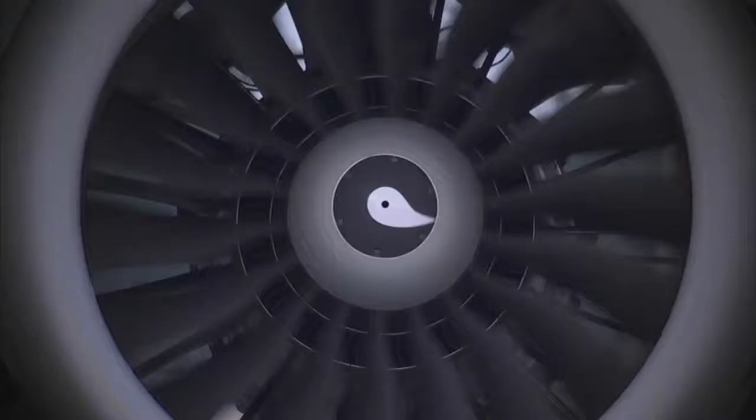The aircraft of today are quieter, more efficient and stronger than anyone could have imagined, even a few short years ago. Of course, future aircraft will continue this trend and become even more efficient and dependable, reaching unimaginable goals that today's aircraft could never reach.

But how will they reach these goals, and who is performing the important work to change the way we all fly? The common misconception is that most advances come strictly from major aircraft manufacturers. But the true story is much more complex. Unknown to most of the public is that one of the unsung leaders in aviation is NASA.

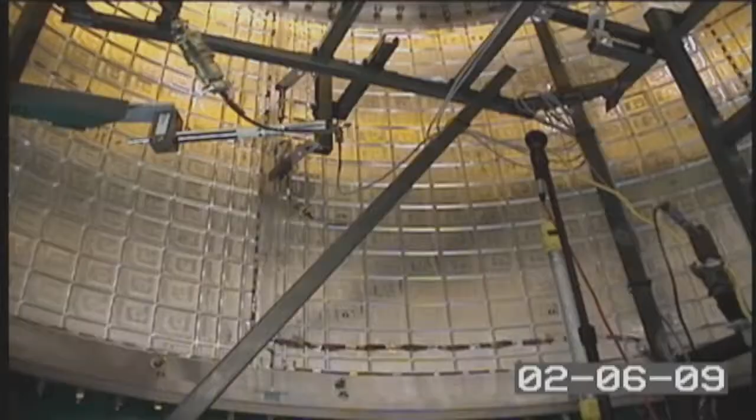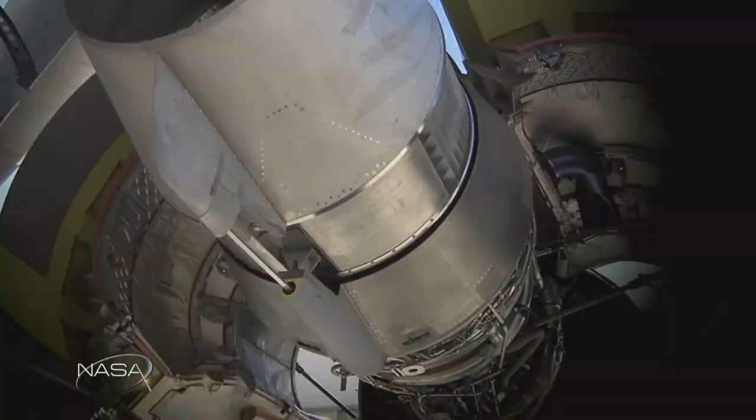NASA engineers work hand in hand with industry planners, developing and testing new designs to make aircraft safer, greener, and much more efficient. On this episode of NASA X, we will look at how this collaboration works, and we'll see how NASA and industry are paving the way for greener, safer aircraft for today and for aircraft of the future as well.

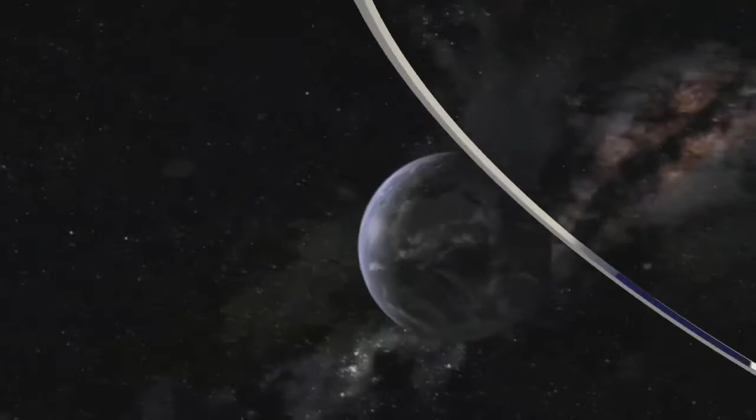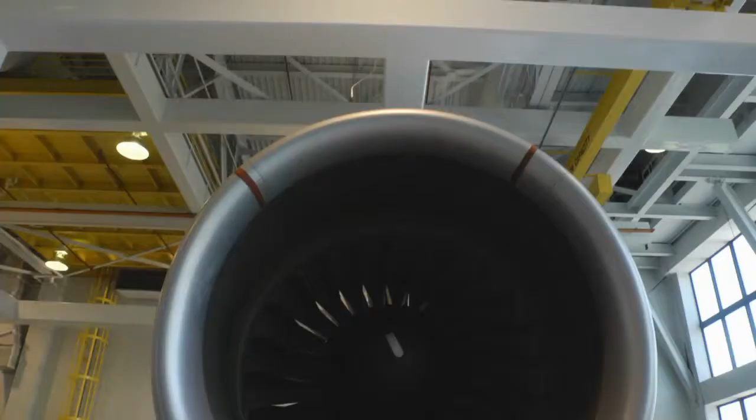This is a familiar sight for modern travellers. Large metal jets roaring down the runway and lifting into the air. In fact, this sight really hasn't changed that much in the last 50 years or so. Other than the way most people dressed for flights back then, the basic concept of air travel is pretty much the same. There have, of course, been measurable differences in fuel economy, with new developments in engine design and noise reduction techniques. But the basic tube and wing shape and the material used to build these aircraft has remained pretty much the same for years.

But that isn't the case anymore. Like so many products that have evolved dramatically in the last few decades, like phones for example, the same is true for aircraft design. Today more than ever, researchers are pushing the boundaries of the science of flight in their effort to make aircraft of the future more efficient, quieter and greener.

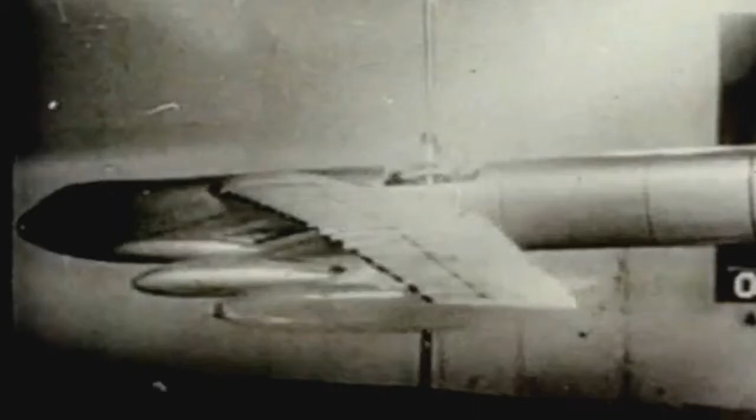So who's taking the lead and why? Obviously industry is taking the lead in some areas because cleaner operations and more efficiency mean higher profits. But they're just not the only players. One of the leading innovators in aeronautics over the history of flight has been and continues to be NASA.

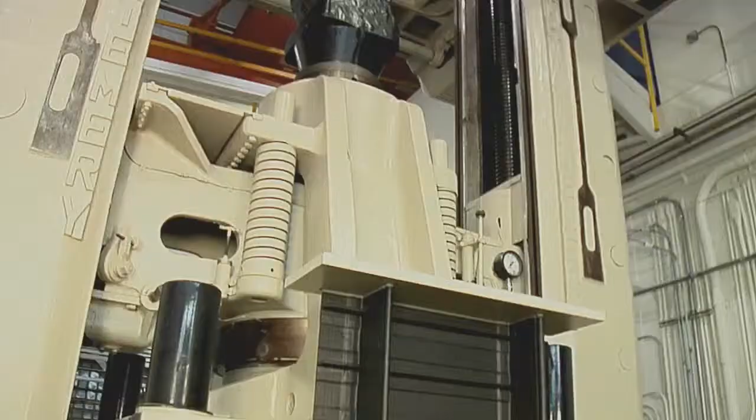The push to modernise and change aircraft of the future is being led by NASA's Environmentally Responsible Aviation project, or ERA. The ERA project is putting its money where its mouth is with tough but reachable goals to make big changes in how we fly by the year 2025.

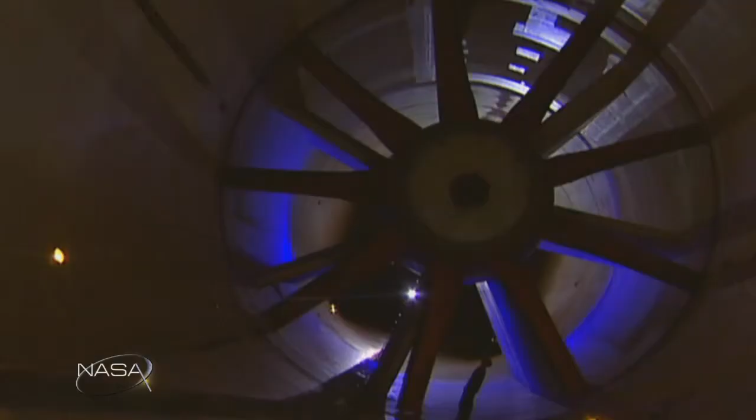So the Environmentally Responsible Aviation project is a 5-year, 6-year project, and it's focused on advanced aircraft design and the technologies that are needed to enable them. The main goal of the project is to reduce noise, to reduce mission fuel burn, and to reduce LTO NOx emissions. And LTO stands for landing takeoff, oxides of nitrogen emissions.

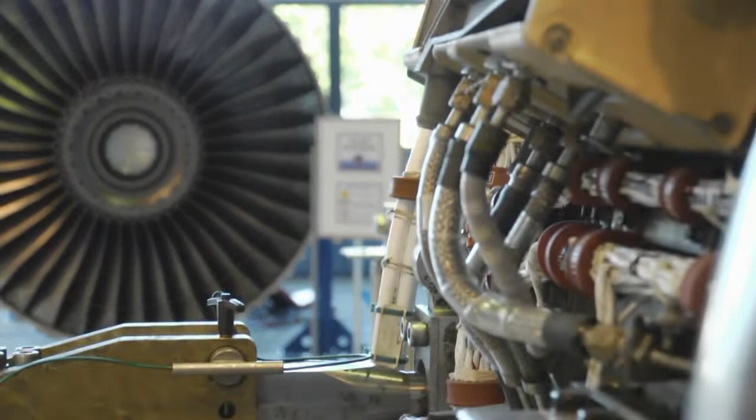And we want to do that simultaneously, and that's never been done before, where we looked at some very difficult metrics and tried to push all of those metrics down simultaneously. And so over this 5 or 6 years, we'll be looking at technologies, we'll be looking at aircraft designs and the combination of those to end up with a configuration that could simultaneously attack these goals.

So how do you make these goals a reality? The 4 basic principles of flight are lift, drag, weight, and thrust. Finding efficiency in each of these basic principles will help reach NASA's stated goals. Let's look at weight first. Obviously, if you can reduce the weight of an aircraft, then you will burn less fuel and therefore become more efficient. Airlines are always looking for ways to carry less weight.

You can see that in extra baggage fees, reduction of heavy items such as ovens and heavy carts on some planes. And in one of the most drastic measures taken in recent years, some airlines have begun asking passengers to use the bathroom in the terminal before getting on the plane, making the passengers a little lighter. In a 1-month experiment, an airline found that they reduced greenhouse gas by 5 tons simply by asking passengers to use the loo ahead of time. This proves that even small changes in the weight of an aircraft can add up to big long-term benefits. The holy grail, of course, is to make the entire aircraft structure lighter.

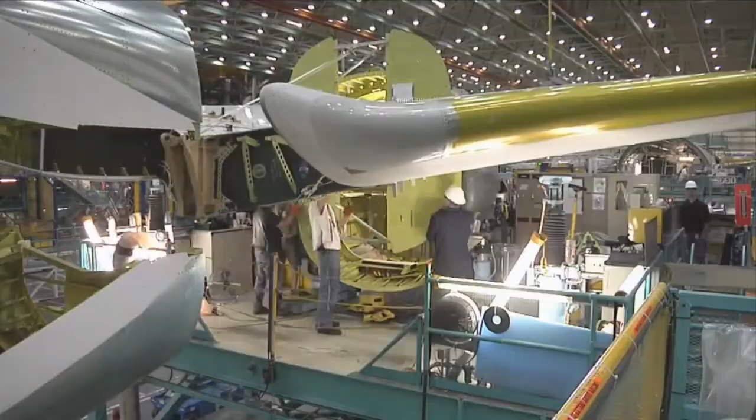So how can this be done? Today's aircraft are made out of metals that are safe, but that are also very heavy. So is there an alternative? In recent decades, NASA and its industry partners have been working hard developing new materials that could bring aircraft out of the 20th century and into the future.

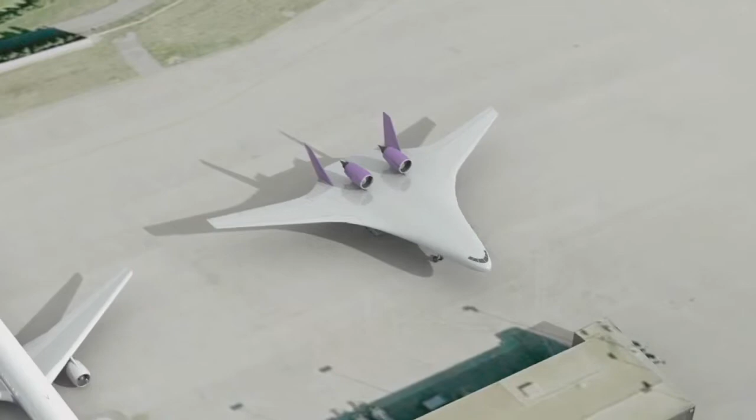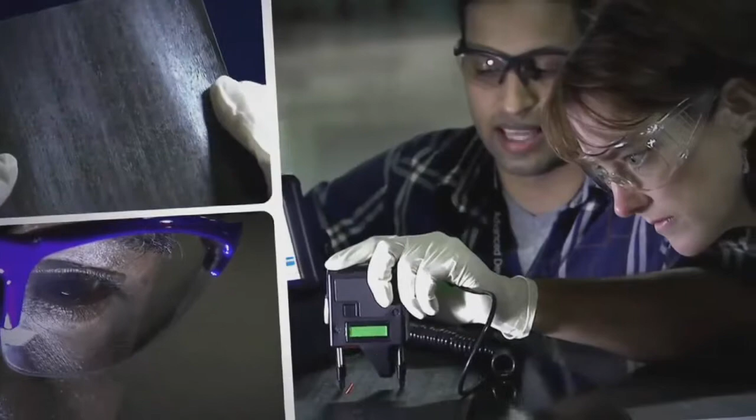New composite materials are leading the charge to replace conventional metals. Aircraft designers are taking advantage of composite materials' lightweight, strength, and flexibility. Aircraft designers have long known about these qualities and have been using something called carbon epoxy composite materials in small quantities for decades.

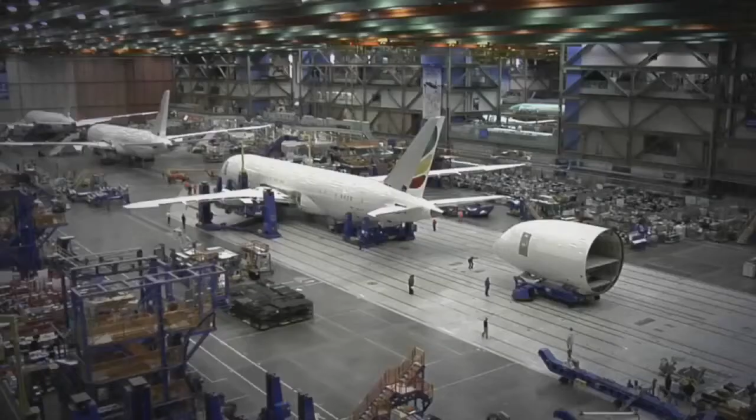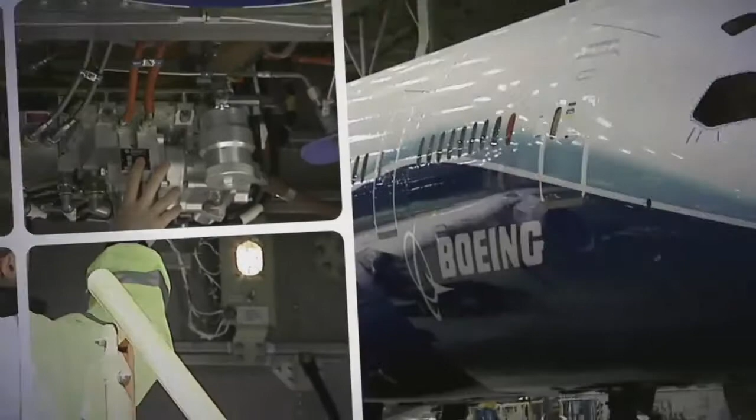After years of research and validation of composites for flight, the Boeing company was the first to step up and build an aircraft almost completely out of composite materials. Called the 787, this next-generation aircraft first came into service in October of 2011. As the first official commercial flight of the 787 took off from Tokyo that year, it was clear that this concept of an all-composite aircraft was here to stay.

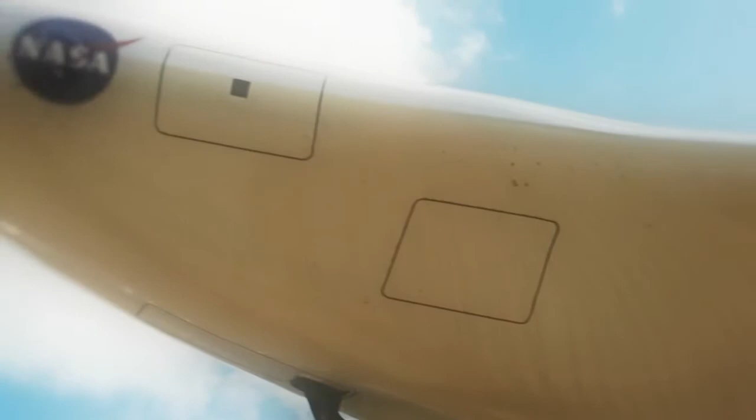NASA is not in the business of building aircraft, but they are in the business of helping lead development programs to move the science of flight along. Once validation and testing in the development process is complete, NASA shares its findings with industry in an attempt to help further research and development.

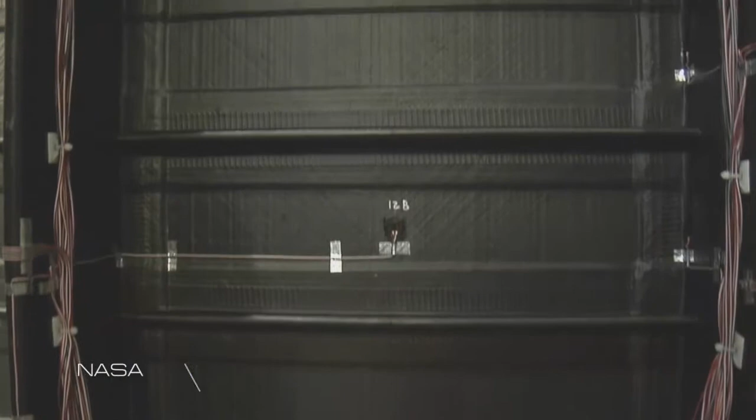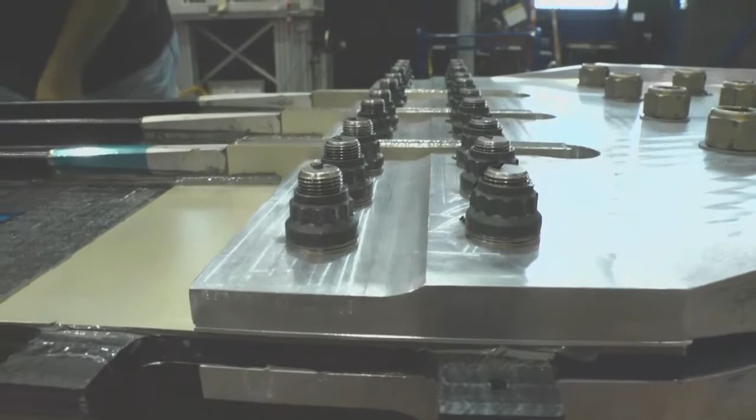One of the programs in which NASA is working with industry is in the development of new composite materials for aircraft. Here, in the Structures and Materials Lab in Building 1148 at NASA Langley Research Center, much of the development of next-generation composites for use in aircraft is taking shape. Called PRSEUS, this new idea has the potential to completely rewrite how composites for use in aircraft are made.

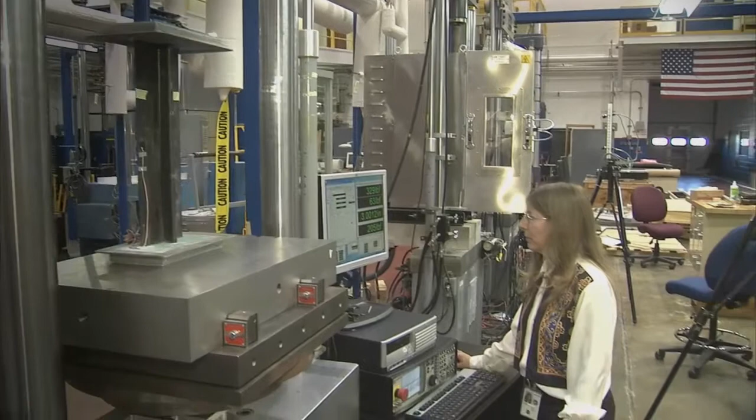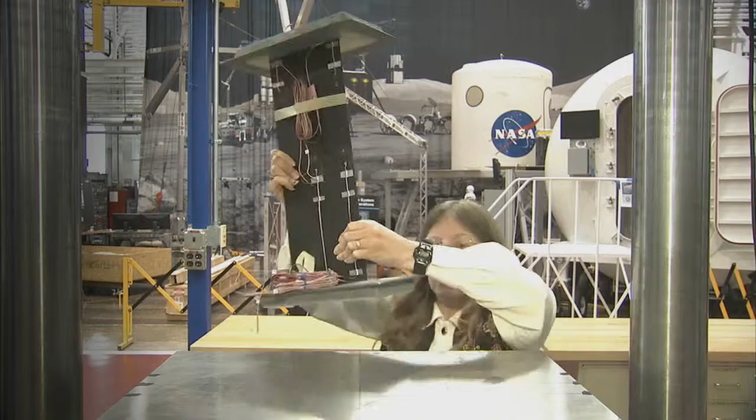Leading much of the research for NASA's Environmentally Responsible Aviation program in the composite field is NASA Langley's Dawn Jegley. This MIT grad has been working with these materials for decades and has a keen understanding of what needs to be done to make these composites of the future fly.

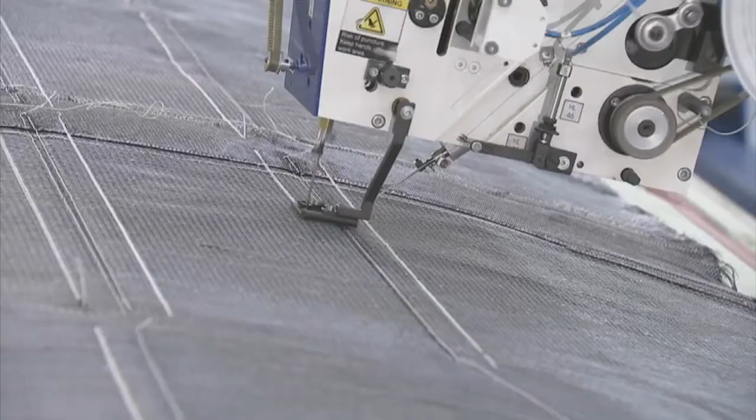PRSEUS stands for Pultruded Rod Stitched Efficient Unitized Structure. And what that means is that we have a graphite epoxy or a carbon epoxy structure, and what we have is pultruded rods inside carbon layers. We have a carbon skin, and we have stitches that run through the thickness that holds the whole thing together. One of the huge benefits associated with PRSEUS is its revolutionary stitching technique.

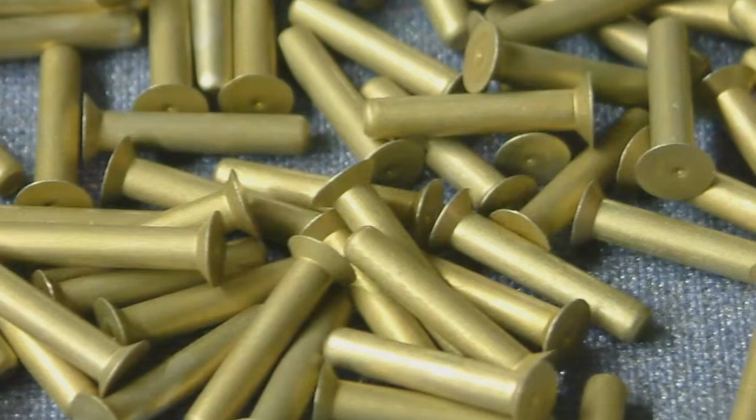On current metal and composite aircraft, one of the key components used to hold the vehicle together are the fasteners, like rivets or bolts. Although these are effective, one major drawback is that quite a few holes have to be drilled into each piece where the fasteners will be added. Not only is that labour intensive, but each hole represents a place where damage or a crack could start. But the stitching prevents that from happening.

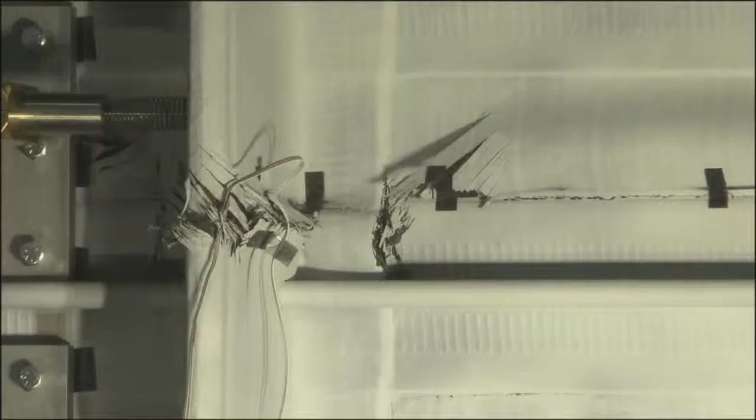We found that if you have a crack and it grows to a certain point and it gets to some place that it's stitched, that crack will turn. So instead of going through the stitching, it will turn. And that's a good thing because in flight, you would rather not have a crack grow all the way around a wing. When you look at a piece of carbon epoxy composite material, it honestly doesn't look very strong in its raw form. But once it is in its final state, it can be much stronger than metals.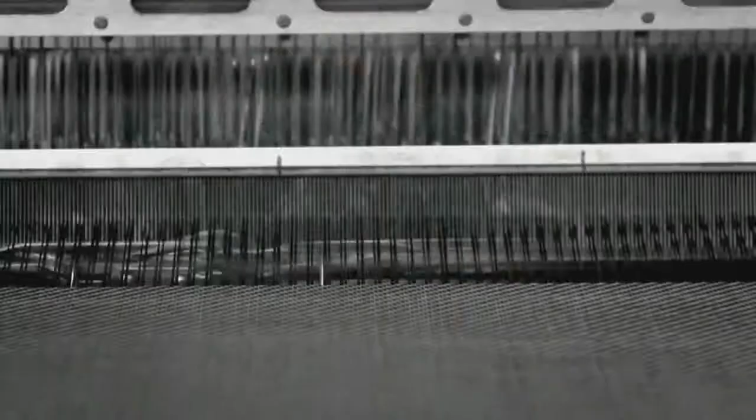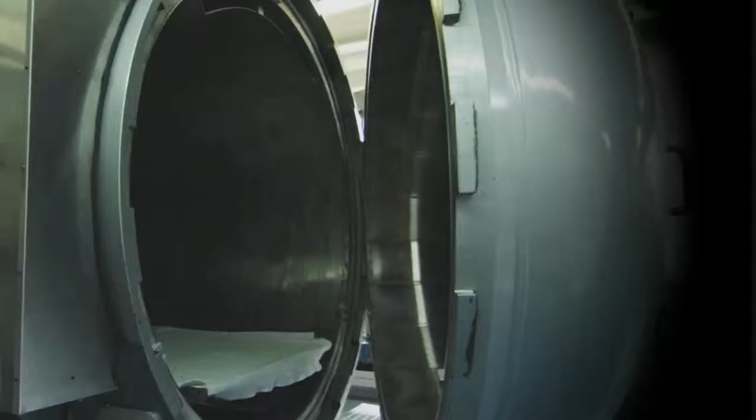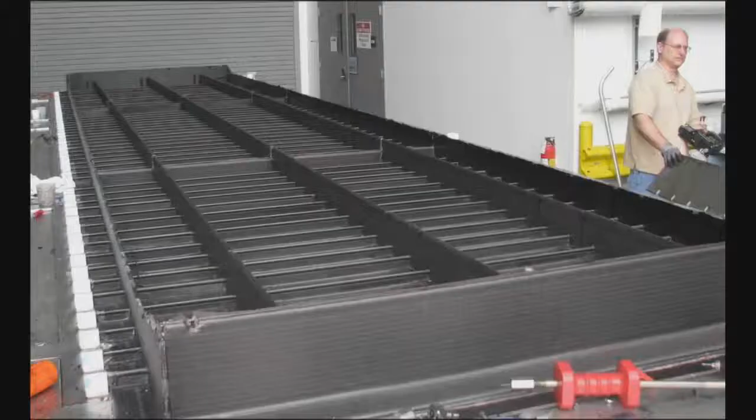We start out with a fabric. It looks kind of like carpeting. And you roll that out into the shape that you're looking for, and you position all the different parts of your structure where you want them, and then you come through with a stitching machine. After you've stitched the whole thing together, the panel goes into an oven. It's infused with epoxy. We heat it up, and then we get everything just the way we want it, and then we cool the structure. So what happens is you end up with a piece of material, could be a very large piece of material, which is now stiff and strong and just in the right shape that you want it.

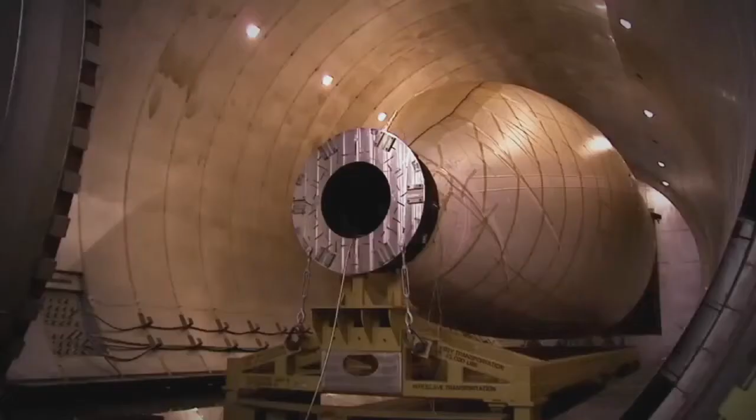Another key component to carbon epoxy composite materials is that they can be tailored to be much stronger than metal. At the molecular level, the properties of metal are isotropic, which means that the properties all run in the same direction. Because of this feature, aircraft designs are very bulky in some areas to provide stiffness, making a craft much heavier. But with composites, you are starting with fibres which are very strong, tough threads, and you can position those threads in any direction you want.

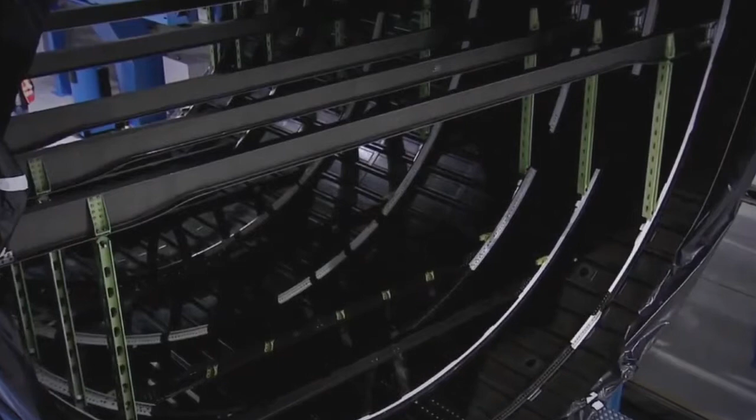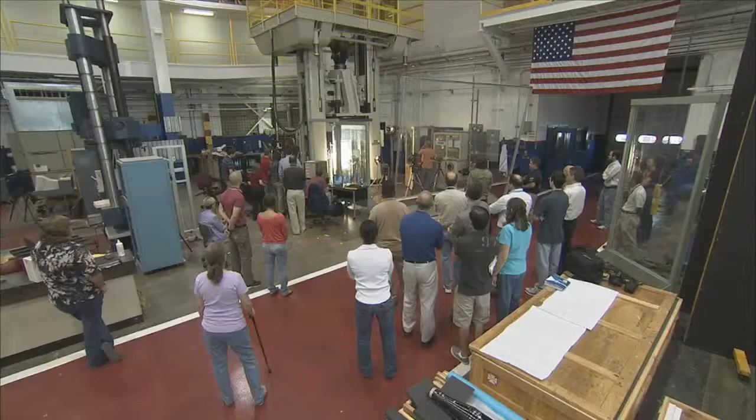For example, if there is an area on the aircraft that takes a lot of load, the designers can place the fibres in that direction, providing enormous strength, but while also using much less material and weight than metal aircraft. Of course, validating that the pieces will work is a major component of the development stage. So I know that NASA really does some great testing of its materials before they go onto any aircraft.

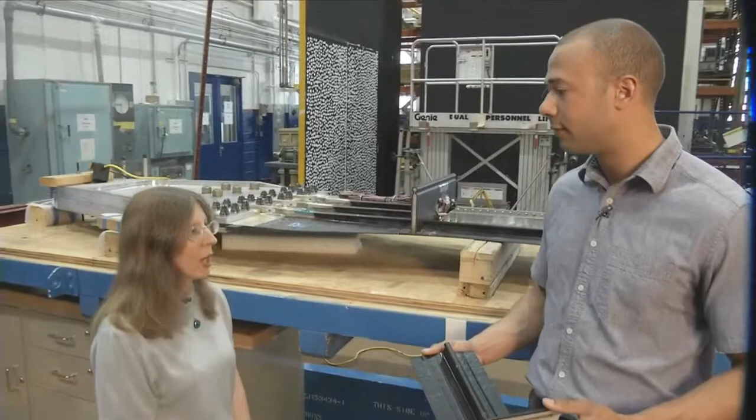How are you testing PRSEUS at the moment? One of NASA's goals is to develop technology for future aircraft. When we're developing a new structure, one of the things we need to do is fully understand how it's going to behave. And to do that, we start by looking at very small pieces, and then we move up slowly to very large pieces until we get to a full-scale part of an aircraft.

And then when we understand that, we go to the next stage, which might be something more like this, where we have what we call a built-up structure. So we have a skin, and then we have a stiffener on it. And then we can apply a load. We might push on it, we might pull on it, we might bend it to look at how that behaves.

And all the while we're doing this, we're doing analytical studies to make sure we understand and can predict how it's going to behave. Because if we don't predict it properly, then we feel we don't really understand it well enough, and we have to take a step back and figure out what it is we're missing. We have many facilities around the center here that we use for doing those kind of tests.

Well, Dawn, thanks so much for talking to us today about PRSEUS. This looks like an amazing technology, and you're doing a fantastic job. Thank you so much. Thank you.

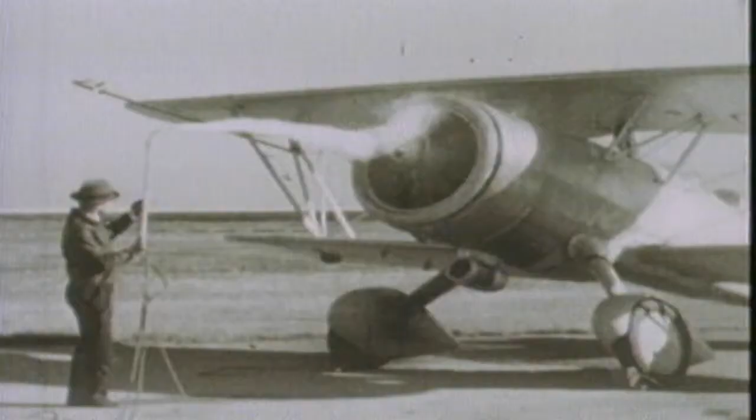Up next, let's look at another of the basic principles of flight: thrust. Since the earliest days of flight, engineers have looked for ways to make the engines we use on aircraft more powerful and efficient. One of the most important early engines was the 1903 Wright brother design that was used for their very first flight at Kitty Hawk. It only produced about 12 horsepower, but it opened the door for all aircraft engines to come.

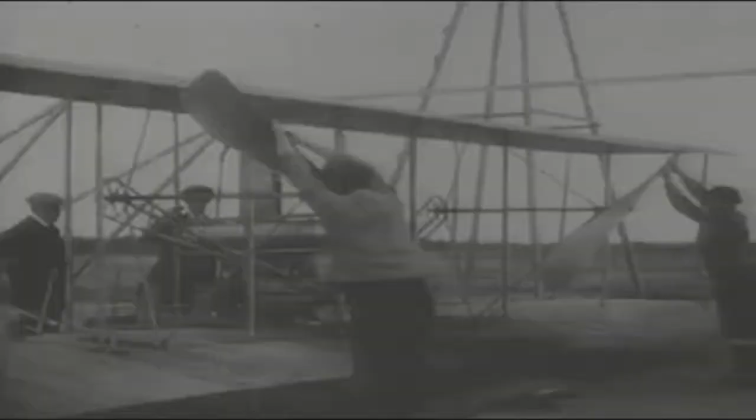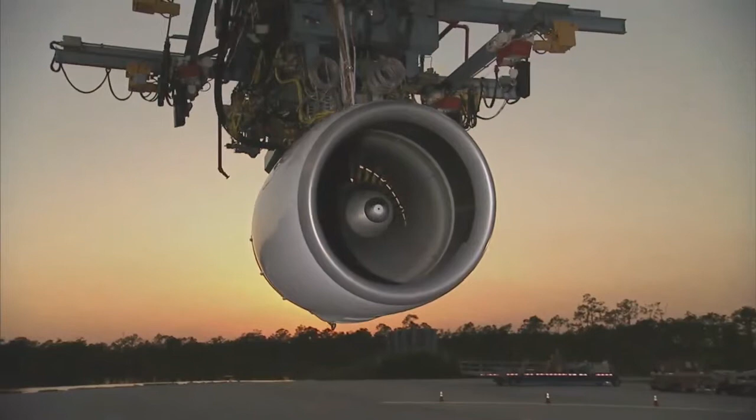Since that time, there has been a steady progression in the development of engine technology, from the relatively simple propellers of the past to the incredibly advanced jet propulsors of today. Engines have never been better, but although current engines are already very efficient, quiet, and relatively green, they pale in comparison to what the next generation of engine technology will be.

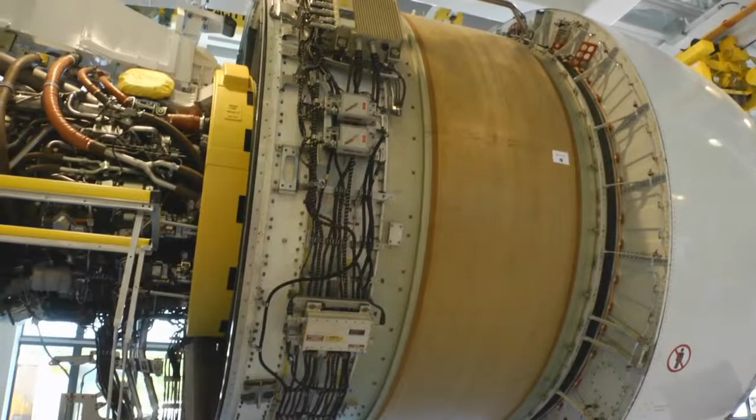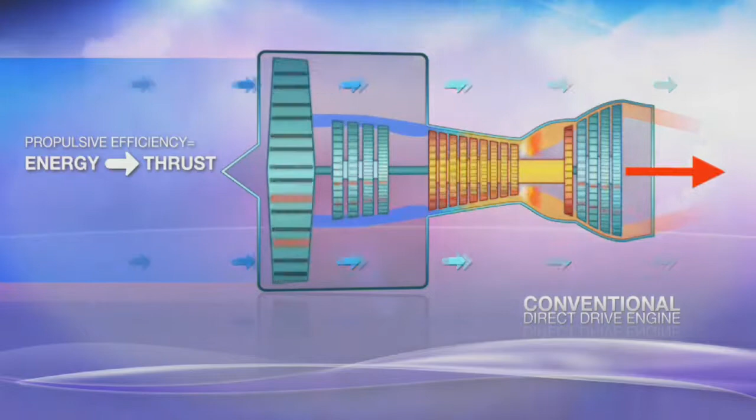To help understand how engine technology is improving, let's first take a look at how a basic turbofan engine works. Incoming air is captured in the engine inlet. Some of the air passes through the fan and into the compressor and burner, where it is mixed with fuel for combustion. The hot exhaust passes through the core and fan turbines and then out of the nozzle. The rest of the incoming air passes through the fan and bypasses or goes around the engine. So a turbofan gets some of its thrust from the core and some of its thrust from the fan.

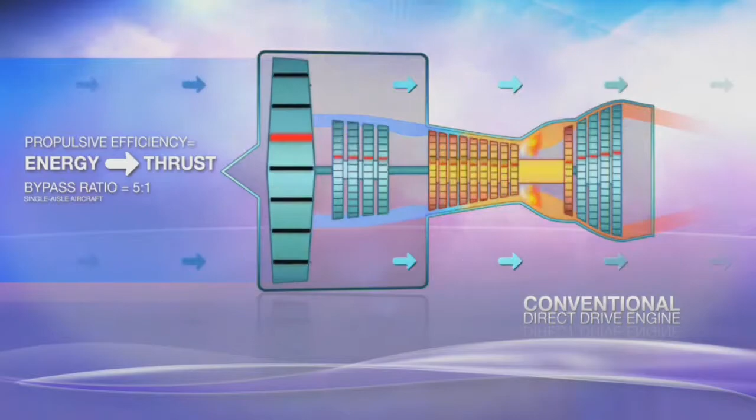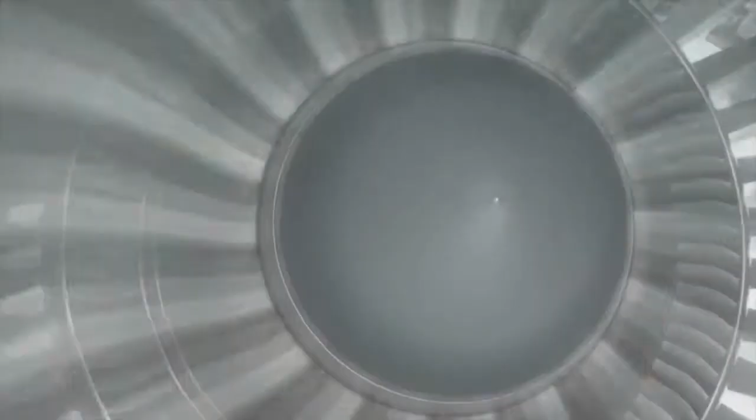The ratio of the air that goes around the engine to the air that goes through the core is called the bypass ratio. Many engines today have a bypass ratio of roughly around 5:1. Engineers have known for many years that if they could increase the bypass ratio, then the engine would become much more efficient. But the trouble with increasing the bypass means that the size of the engine would have to grow, making it heavier and also unable to fit under the wings of most planes. So, what to do? Over the past 20 years or so, NASA and industry have been working on a solution that would create ultra-high bypass engines while also addressing the stated problems of size and weight.

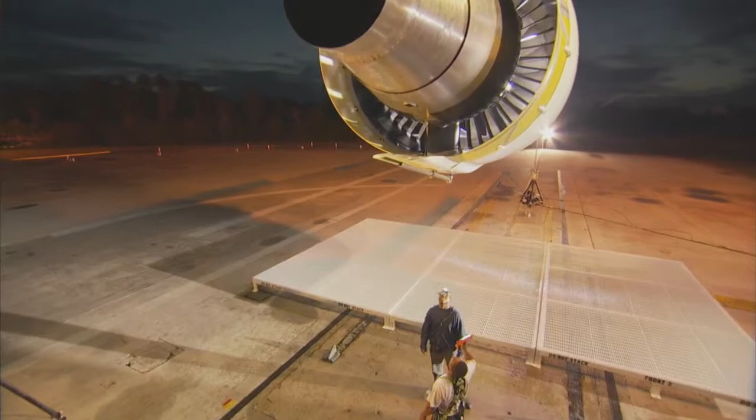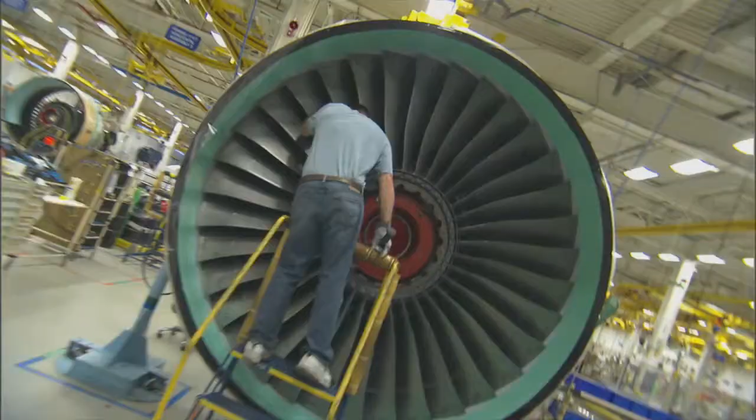Today, a new engine designed in collaboration with Pratt & Whitney and NASA has been developed that will more than double the bypass of current engines. This new engine design has taken many years of research and development just to get to the point where we are today, because 3 key pieces of technology needed to be created that didn't exist: a new gearing system, an ultra-efficient fan, and a more efficient nacelle.

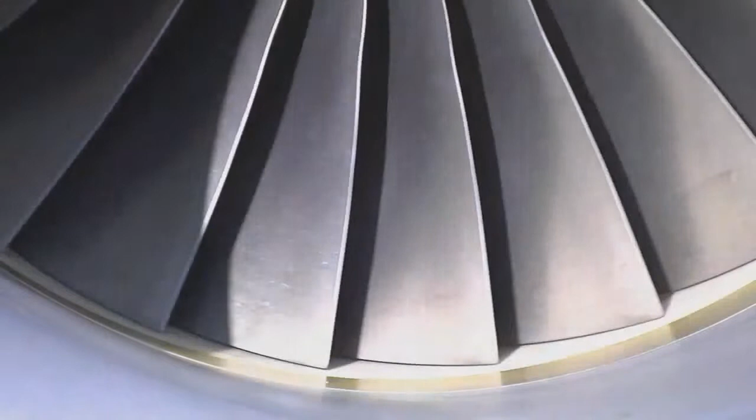Although each of these were difficult to perfect, one of the most challenging was the gearing system for the turbofan. This is because there is a paradox in engine design. The slower the big fan at the front moves, the more efficient it is, but the turbines at the back have to move at a very high rate of speed to work efficiently, hence the paradox. In order to have the slow-moving fan at the front and the fast-moving fans at the back working together, a revolutionary gear system had to be developed that could allow both of these parts to work together optimally.

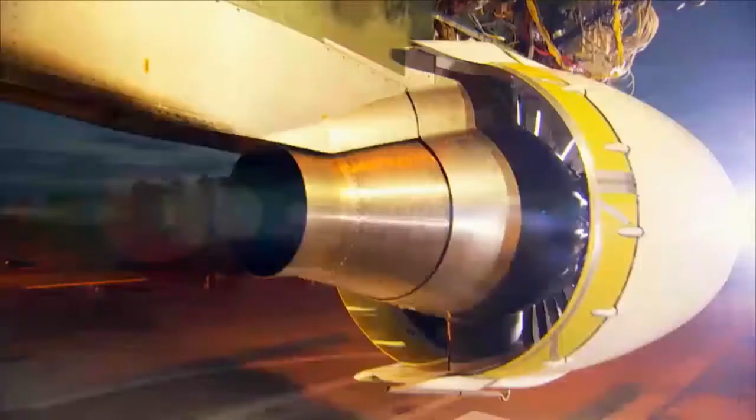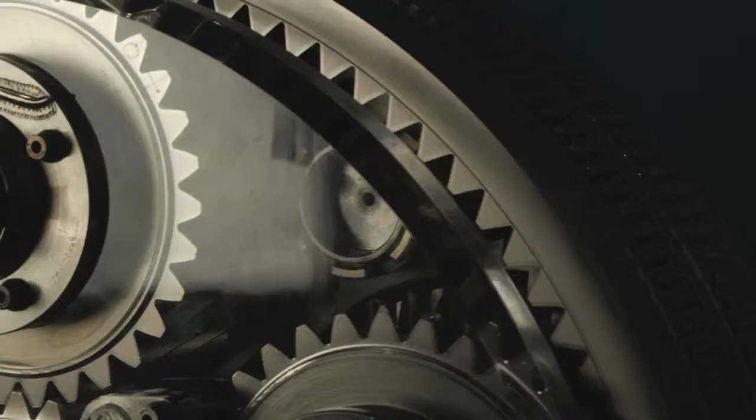So what the gear lets me do is shrink the core engine that makes the power to a large degree. It makes it lighter, takes a couple of thousand parts out, and it means I can replace some very rare super alloys with some more common gear steel. We always knew you could do that, but you need a gear that's way over 99% efficient. We're talking about 25,000, 30,000 horsepower gears.

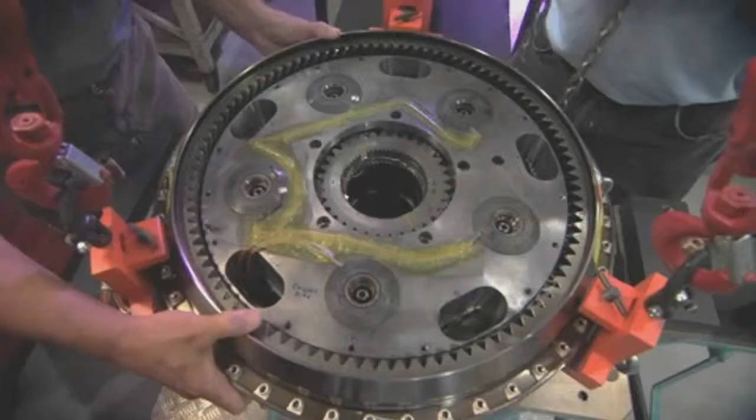A naval ship has that sort of power, and the gear is the size of a small house. We had to develop a gear that's the size of a small automobile wheel, not a house, and it has to last 20 years without maintenance, and it has to be super efficient. And so we've been working on this for at least 20 years.

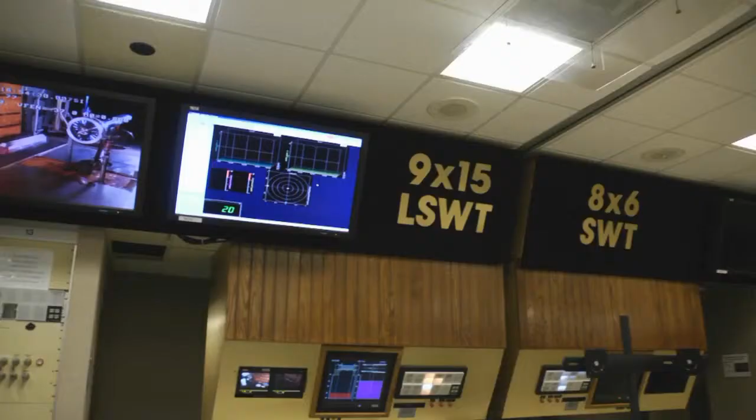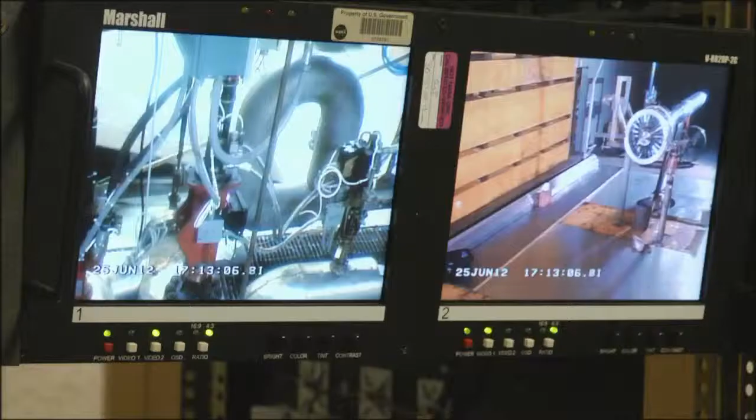Much of the testing for this engine has in fact come at NASA laboratories. NASA's unique facilities and subject matter experts have helped the Pratt & Whitney team to understand how to configure the ultra-high bypass engine. So this is an example of the ultra-high bypass engine from Pratt & Whitney called the geared turbofan. This particular engine has a bypass ratio of up to 15:1, which means 15 times the amount of air goes through this part of it as goes through this part.

This is the core, or the engine part. This is the bypass part. In this particular engine, most of the thrust is generated in this part, and we've removed the fan so that you can see how small the engine airflow is compared to the overall flow.

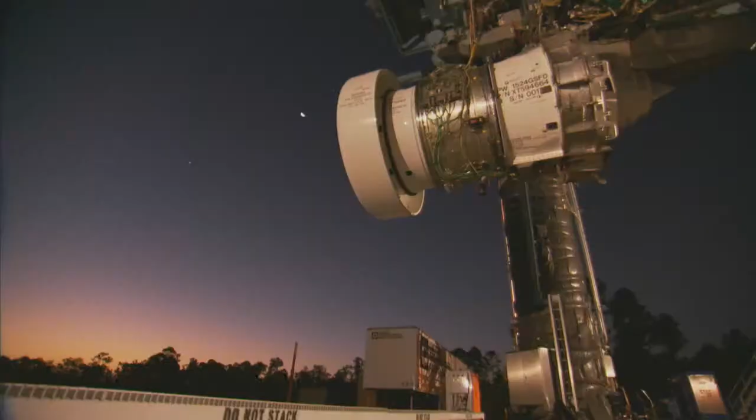So why do we want to do this? Well, this particular design, especially the one Pratt & Whitney is working on called the geared turbofan, has the potential of having as much as 20% better fuel burn than a regular jet engine today. And the reason they can do that is because the more air that you can put up here, the more efficient the engine is and the better the fuel economy.

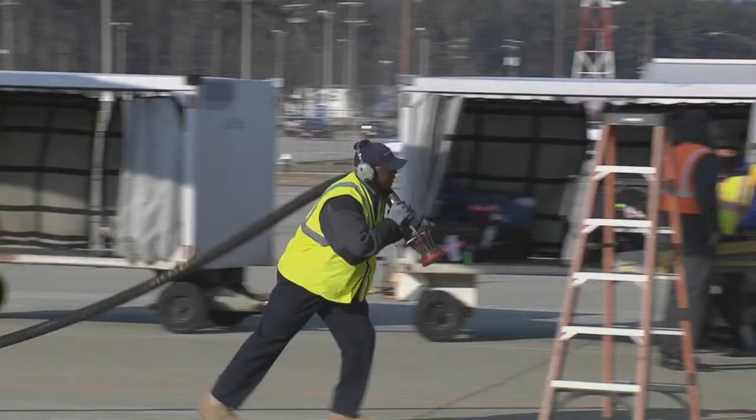Because fuel costs have spiraled out of control in recent years, the fuel efficiency of this engine could be a game changer for the aircraft industry. The people who care are not so much Airbus, but their customers, the airlines. So an A320 with these engines on compared to the current engines will make $200 to $400 an hour, on the order of $1.5 million to $2.5 million a year reduced fuel cost, depending upon the cost of fuel, typically. So it's worth millions per year for the airlines.

That doesn't mean they still won't charge you for the extra bag, though.

Of course, fuel economy is not the only huge benefit to this engine. Its noise reduction capability is truly astounding. On a typical jet aircraft, the fans at the front are moving at more than the speed of sound, making them very noisy. But because this new engine's forward fans move slower, they now make much less noise. They are really quiet. And how quiet is really quiet?

For a 737-sized airplane, 150-passenger airplane, the objectionable noise on the ground, the area that hears objectionable noise, is reduced by about 3/4. Almost to the NASA goal, which is to keep it in the airport.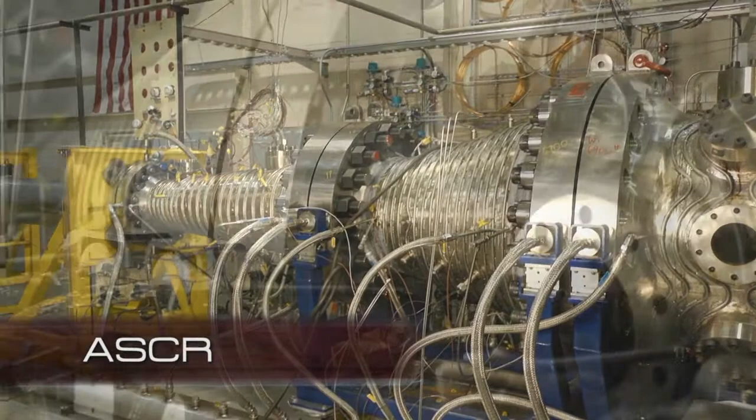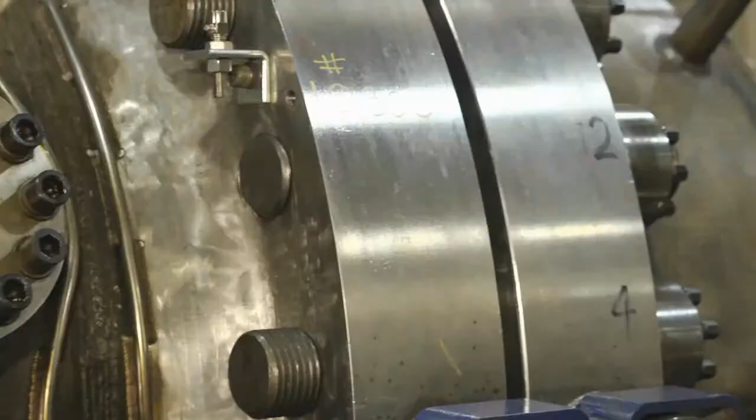Another key component in the testing chain of the entire engine happens here at NASA Glenn, in the Advanced Subsonic Combustion Rig, or ASCR. This facility is the only one in the country that allows real-time, real-world testing conditions for engine combustors. This is the Advanced Subsonic Combustor Rig. It's really one of the unique facilities in the U.S. which enables us to test combustors and gas turbine engines at realistic conditions that they would see in a gas turbine engine flying in today's aircraft and even those in the next 20 years from now.

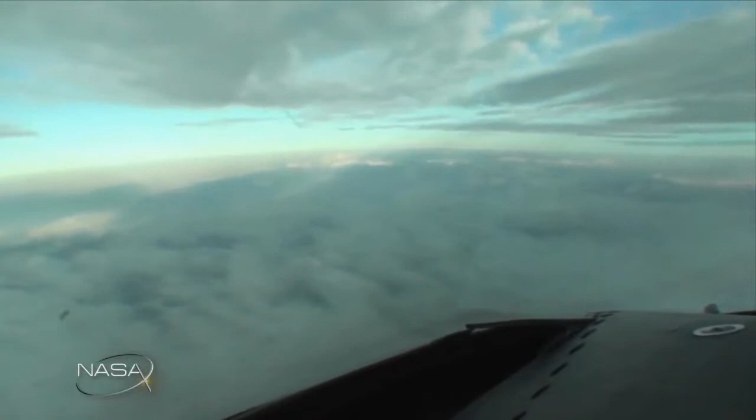The real beauty of this rig is it allows us to operate pretty much over the whole flight regime. So we can map out what the emissions are near the ground during idle and takeoff conditions, but also on approach and landing, in addition then even at cruise, because we're also becoming more and more concerned about emissions in the atmosphere and what that does to our environment.

The environment is one of the key components in much of the work going on now. NASA and industry realize that good stewardship is not only beneficial to the planet, but can be a good business model too. The work that is coming out of this program is looking at both fuel-flexible applications as well as strictly environmental concerns. Our geared turbofan is 15% more efficient and can run on a wide range of fuels. In fact, we're some of the leaders working with the industry in the development of biofuels.

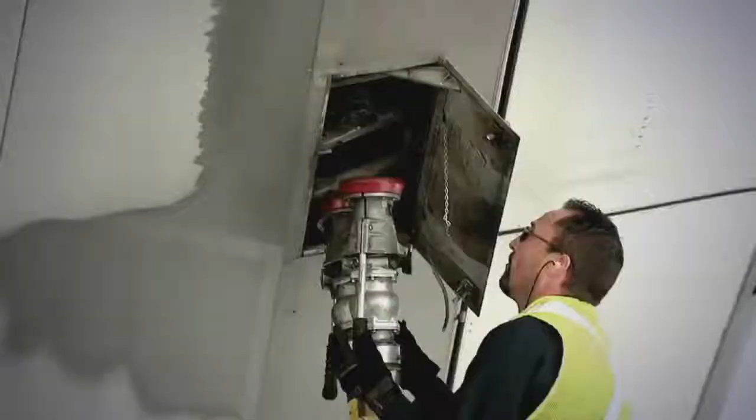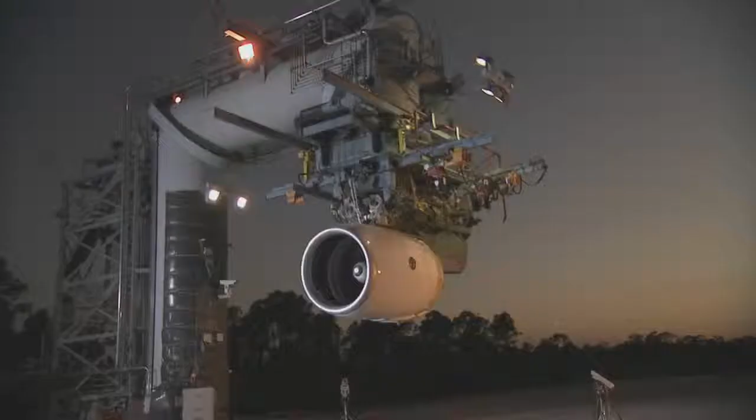Of course, testing for these new engines is not only happening at NASA, but can also be seen on a unique airplane owned by Pratt & Whitney. Pratt & Whitney actually owns two 747 airplanes that we do testing on. There are 4 engines on a 747. We'll actually take one of the existing JT9Ds off, which is a Pratt & Whitney made engine that powers 747s, and we'll actually in some cases replace that engine with one of our test engines. So we'll run the airplane on 4 engines, 3 of which are currently certified on the airplane, the 4th being the experimental.

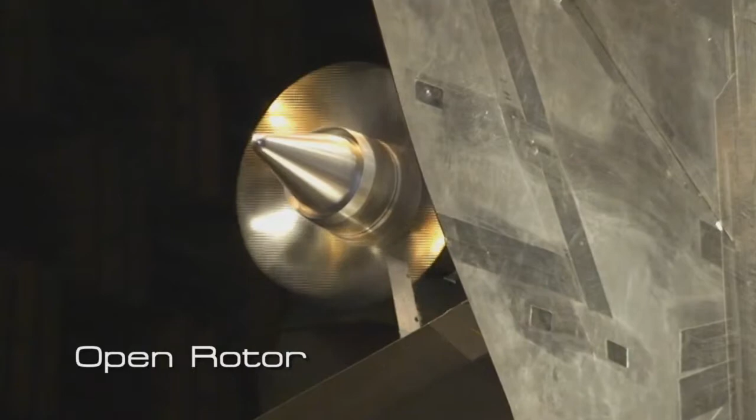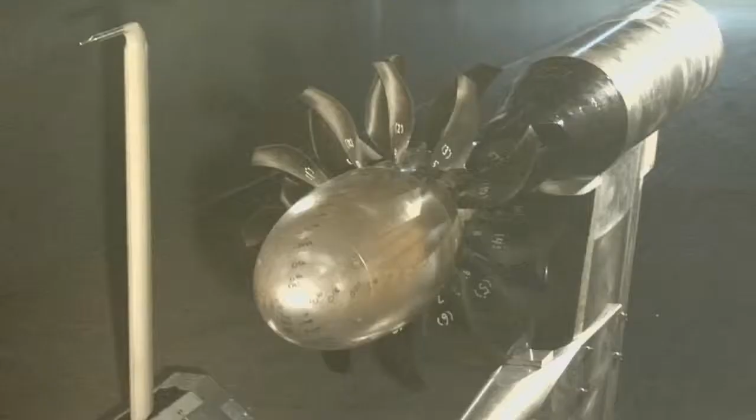Of course, this new geared turbofan is not the only game in town. NASA has also taken a look back at some older technology, including a concept called the open rotor that also shows much promise. So here at NASA, we're working on the next generation of engine technologies, both ducted engines like the geared turbofan and unducted engines like open rotors. So we recently finished a series of tests with General Electric and the Federal Aviation Administration on open rotors, looking at these technologies to reduce fuel burn and improve the acoustic performance of these next generation engines.

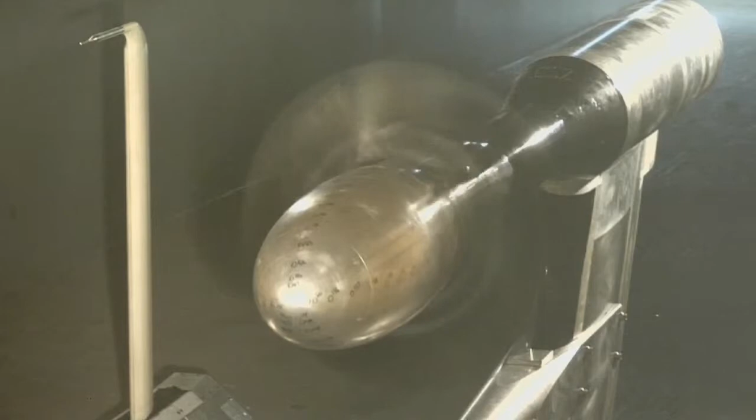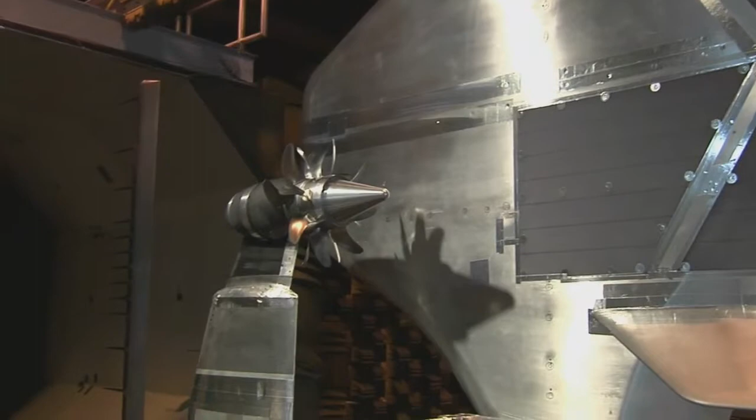So as you try to go to higher and higher bypass ratio engines, the fans keep getting larger and larger diameter, and at some point it just makes sense to get rid of the cowling and go with just what essentially looks like a propeller. The difference is that these are very specialized high-speed propellers, so that an open rotor powered aircraft would be able to fly at essentially the same speed as an aircraft with a jet engine.

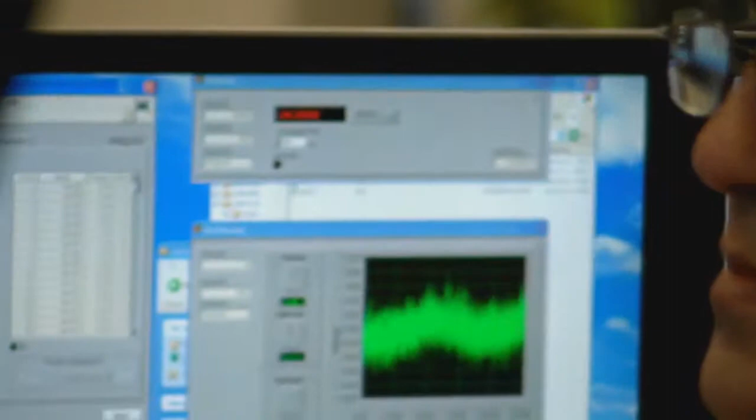In the past, the open rotor concept had been promising, but the major drawback was the noise. Thanks to the advent of modern computational fluid dynamics, NASA and industry engineers have been able to redesign the blades for these open rotors and make them much, much quieter. The system studies that NASA's done has shown that for single-aisle aircraft, if we built an open rotor engine today and put it on an aircraft, it would probably be quieter than most of the aircraft that are flying out there right now. So we've come a long, long way in being able to solve the acoustics issues that were part of the original unducted rotor program.

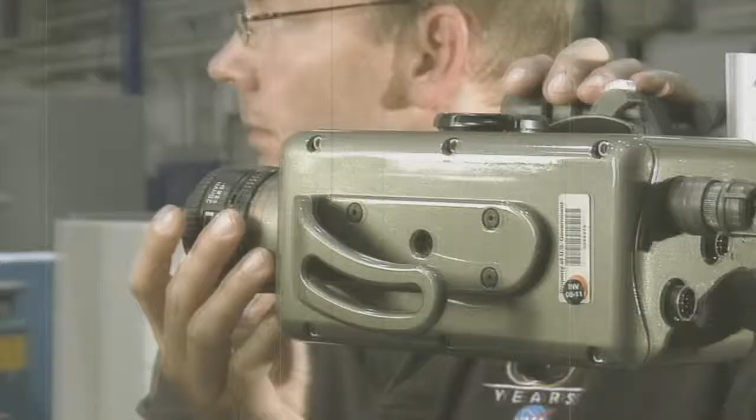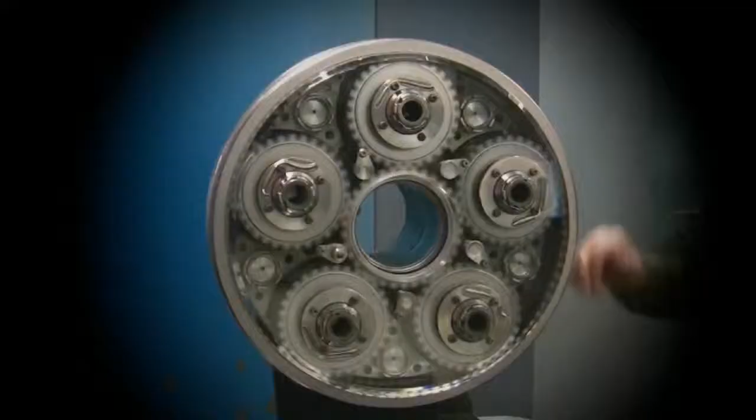So, there you have it. NASA's ERA program and industry are truly changing the way we all fly. NASA is pushing the industry hard to make these changes see the light of day, and industry is responding with truly innovative and groundbreaking technologies. With this type of collaboration and work ethic, there's no doubt the world will soon see a dramatic difference in the way we all fly.